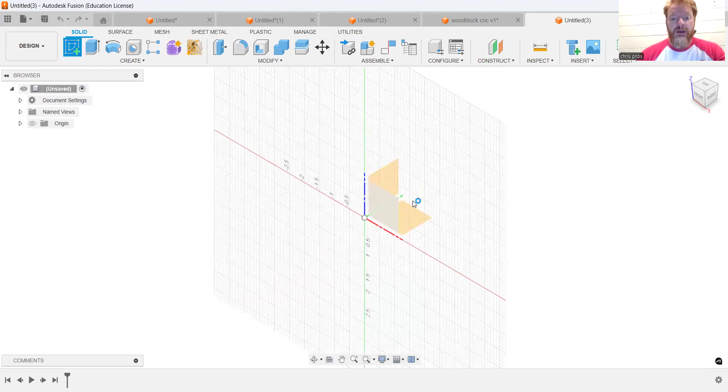We're all going to start with a block of wood. I'm in Fusion, just making a normal thing. I'm going to use this plane, and I'll show you why. I'm going to make this 3.5 by 3.5 inches—make sure you're in inches—and extrude that 0.75 inches.

So this is the piece of wood that we're going to be engraving. Now, first thing I need to do is actually change the physical properties of this block to wood. If I come over here to bodies, you can right click on it, physical material.

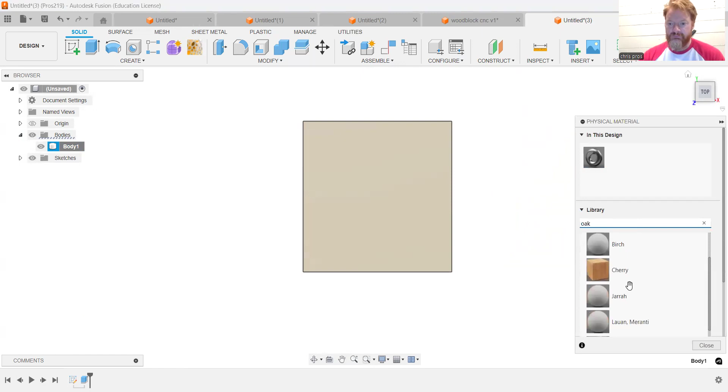And write oak. Find oak, white oak, drag it onto it. There you go. So now I have a piece of oak that's the right thickness that we're going to start working on.

Now I'm going to give you a website where you can download some simple SVG files. That's what we're going to use. So I'm going to insert an SVG—I've already downloaded this onto my computer. You could choose what you want, but simplicity in this case is going to be good.

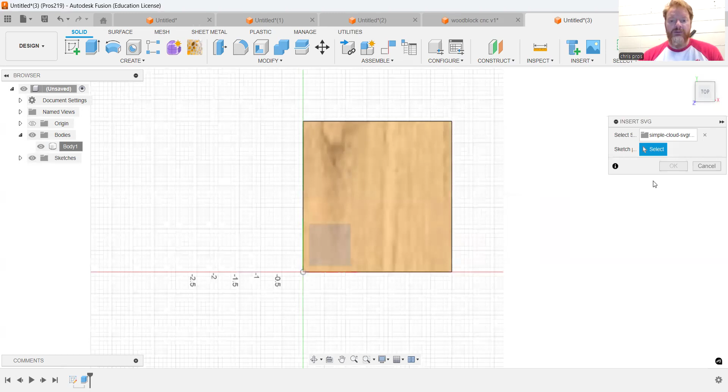When it's here, it's going to say, where do you want to put it? I want to click on the actual face. And you'll see down here, my cloud, it's upside down, so I'll flip it. I'll make it a little bigger and place it on the wood.

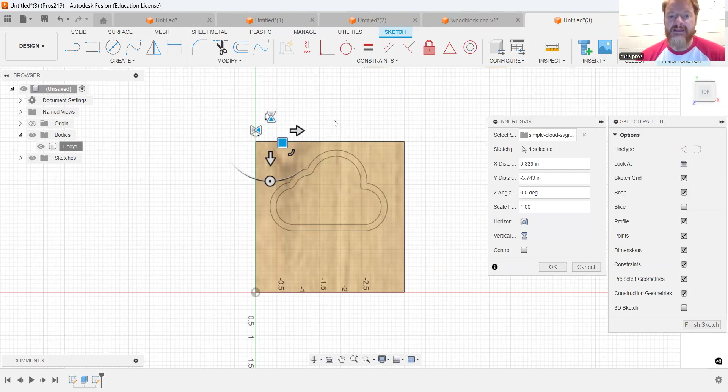I do not want this to be all the way close to the edge, because I don't want to accidentally hit my clamps or something like that. So I'll just put it right there.

I'm also going to come in down here and use text. And here I'll just write what it is.

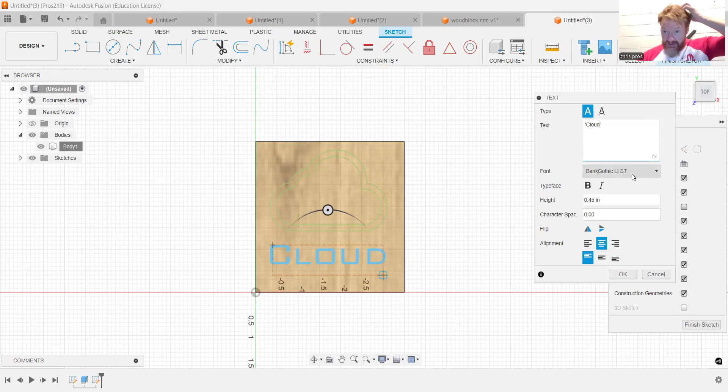Now, the reality is I'm choosing this font here. Depending on the font you use, you may have issues with your carvings, right? Because if you have ones with very fine detail, finer than our bit, then they may not show up when we go to engrave—you might get errors. This one tended to work for what I'm going to do, as long as my height is significant enough. So the height means height of the letter.

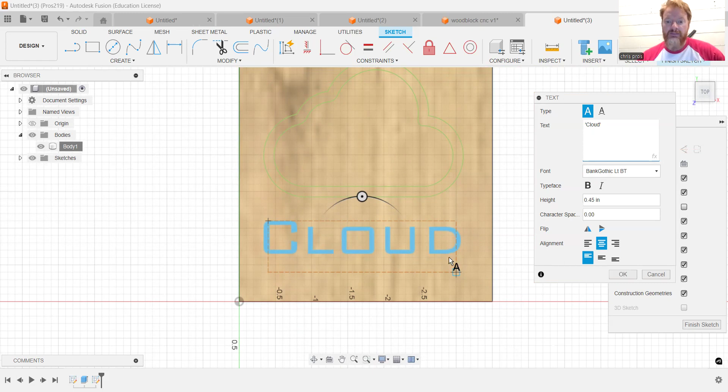So there you go. Now I'm going to extrude this. Now, in our last project, we dropped this down 0.0625—that would be negative 0.0625.

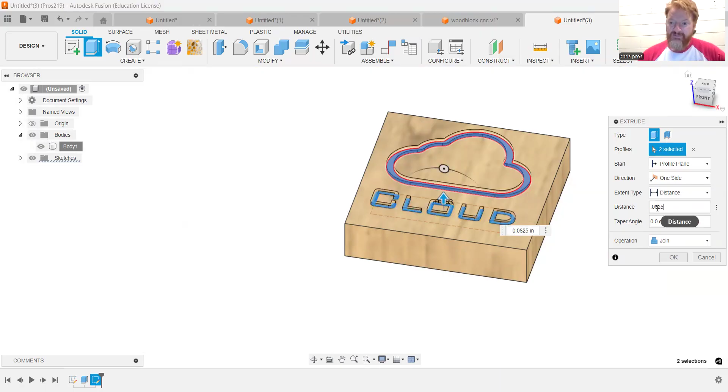However, this one, our bit's going to be a little smaller. So I'm actually going to change it to 0.0325, or even 0.03125. There you go. Make sure it's negative, so it's going into the wood.

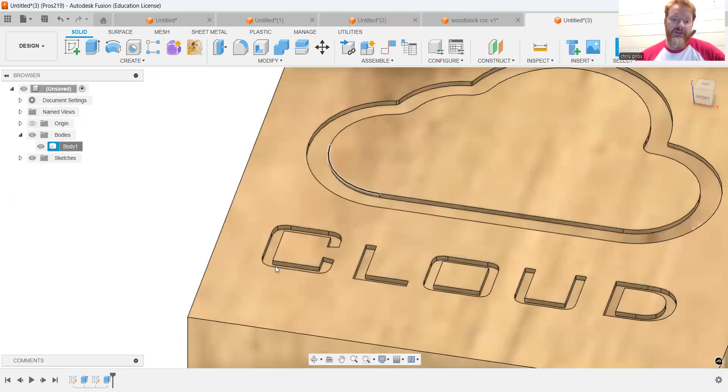You may, because depending on the plane you chose, have to adjust that. But this is what we want it to look like in the end—a small engrave all the way around this piece of wood. So now I have this, and I can go into manufacture.

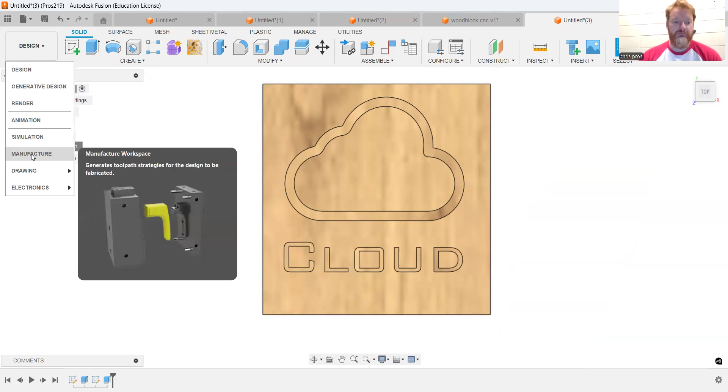You might want to save this at this point too. So over here in the corner, we've been working in design. We want to switch to manufacturing. You'll see now all my tool options have changed.

First thing you have to do anytime you go to manufacturing is you have to do a setup. Setups are over here—I click on this block, and it's going to say all these different options.

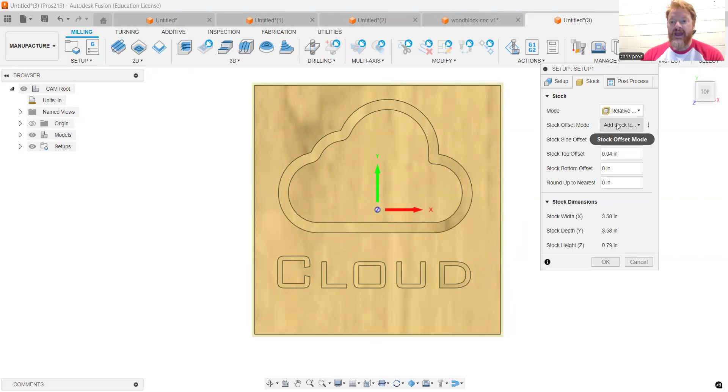Now, first thing I'm going to do is go to stock. It says, do you want to add stock? Basically saying, so you don't have any issues, you have a little bit of wiggle room—we add a little bit on top of this. I'm going to say we don't need that for this.

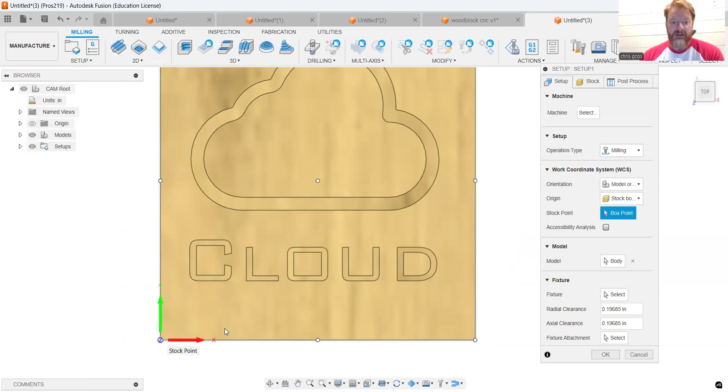So that's under stock. Now under setup, all I really need to do is make sure I don't want my XYZ plane starting here, I want it to start down here. Actually, the way I have it set up is pretty good.

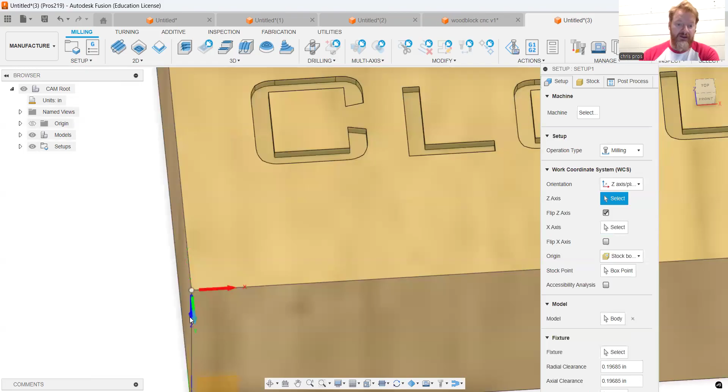X, Y, and Z goes up and down. Now if you don't have that, because you chose a different plane when you first started, you have to start toggling around to get to XYZ. If I click on the X, it'll flip it around. If I flip on the Z, it'll flip it around. But sometimes that doesn't work either.

Oops, see, now I'm on the wrong dot. And now I have the XYZ where I need it. You may have to come and play around with some of these options and do some flipping of your Y's and your X's, like here, to get to this XYZ, and I can help with that if we need to.

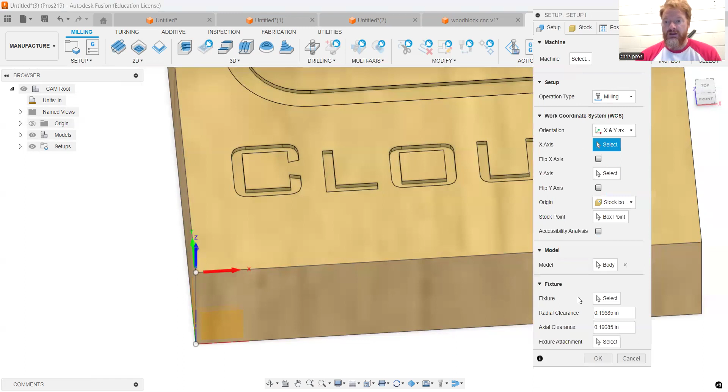So from there, I'll press OK. So now I'm starting at this point and I can set up my carving operation. Now we have all these cool tools that we can use, clearings and pockets. Because this is our first time, we're just going to use a simple engrave.

It's going to ask you what tool do you want. I will send you a tool that you can upload. It's an engraver bit. It sets your speeds for you, it sets your feed rate for you, it sets all the things we had to do by hand. It sets it for you, and you can adjust these if needed. We're not going to have any coolant on this one, but you could do air and all these other details as well. We'll talk about that at a later time.

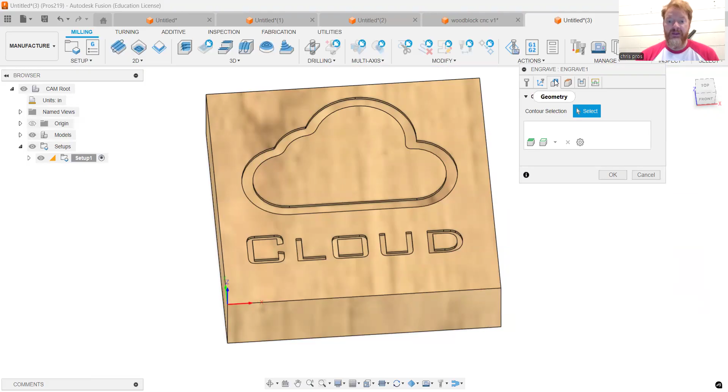Over here we'll go to geometry, and we got to say what do we want to cut out. I want to cut out this, the C, the L, and I want to click at the bottom of it. See how it's highlighted like that? The O, the U, and the D.

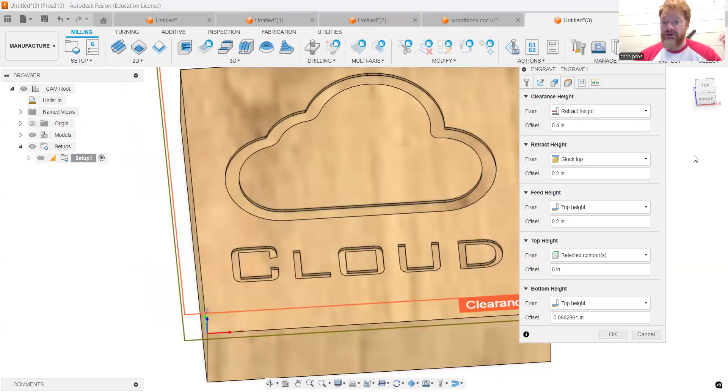So 6 contours. If I click on heights, it's going to say like when we put in our Z heights, it's going to have them already set for us. In this case, because we have everything else set up, we shouldn't have to make any adjustments, but you could if you needed to.

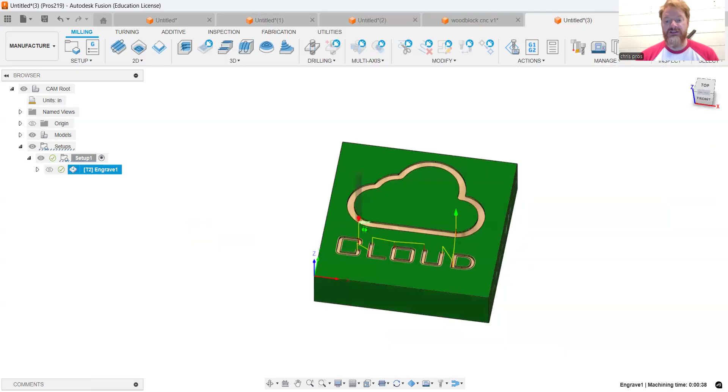We won't worry about our passes and our linking for this time through. All right, so now that's what we're carving out. You see the green start block and you see the rest carved out. So we did that correctly.

I can run a simulator right here, simulate, and I can press play, and that's what the carving's going to do.

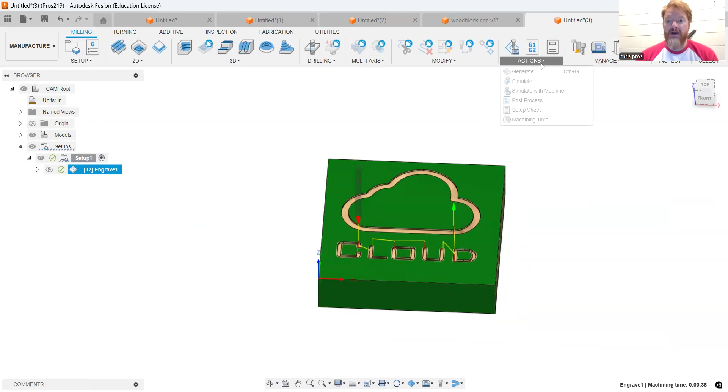Now we can send the G code out, and that's a post process. Now we're using the Haas desktop mill. You may have to search for that, Haas desktop mill.

I already have it, but you'll set that up. Now my output folder, I want to get my USB drive, I will stick it in there. I don't have one on me at the very second, so I'm just going to switch to my download folder, but you're just going to plug your USB and save it to USB. I'm also going to name this Cloud Engrave 1, and I'll click Post.

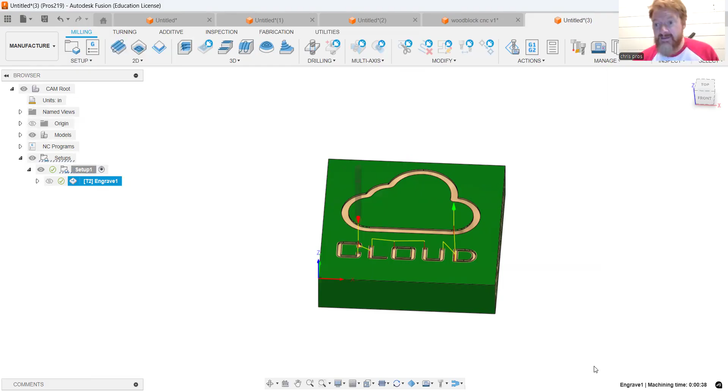Now saved, you see here, successfully. I can view the code. Now saved successfully on my computer, in your case the drive, will be our entire G code. And you can see this G code is pretty significant compared to what we were doing before.

And this is what we can now stick in our computer. This little piece is 1,308 lines long. We can stick that into our machine, run that graphics, make sure it works, and then carve it out of the wood. So that's going to be our next project. Hopefully this helped you get to what you needed to do.